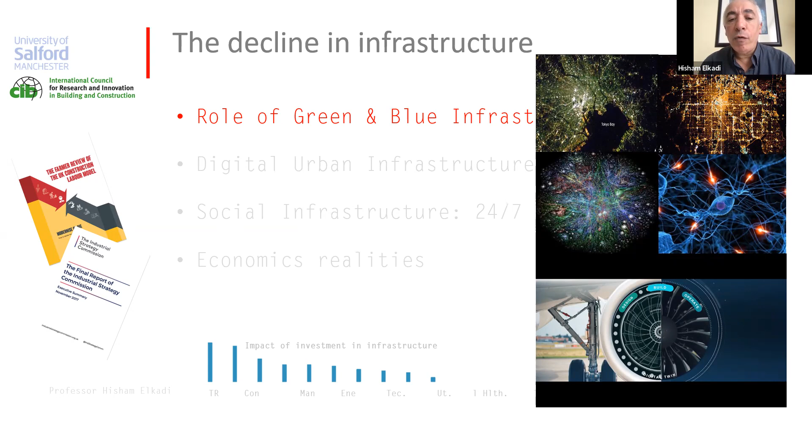There are other issues too, with digital urban infrastructure — the metaverse, what's happening digitally in cities, social infrastructure, the change of cities into 24/7 economies, and the economics and reality of that. All that is important, but today I can't talk about all of it, so I'll focus on the roles of green and blue infrastructure.

You've all heard about it — every single city, every national government talks about smart cities, smart buildings, smart urban settlements, and so on. If you look at what we mean, every time I try to ask what do you mean by smart cities, you get different definitions.

But generally there are two definitions. What I call technocentric, which is the use of ICT, all the gadgets, all the monitoring, collecting data everywhere, and building this meta database to make it intelligent, interconnected, and efficient. That's how it started about 10 years ago. But they realized they got all this data, and it doesn't make cities any smarter — it just collects data.

So they moved to the second definition, which is very much politically directed. They said no, it's not just about the data, it's about people, it's about services. I call this one people-centric — sorry about the slides, it's the other way around in the comment next to it. So the second is people-centric, about human and social capital, quality of life, participatory governance, and so on.

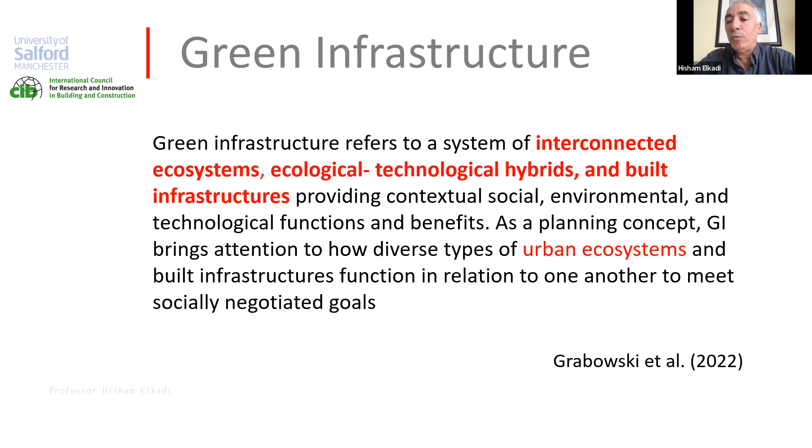And I buy this definition, and I apply it in a number of large projects in cities, which I'll explain to you in a minute.

Going back to my PhD and my conclusion, part of my conclusion in 1988, so that's 35 years ago, was these 9 principles. If you take away what I said about the definition of smart cities and what I believe is a good definition of green infrastructure, and you go through these 9 principles that I talked about 35 years ago, I think they're pretty good.

A portfolio for some of the projects. I've worked on these principles for a number of cities around the world, a number of projects of different scales, but I always have these 9 principles in mind when I do my projects.

Things about variety of energy resources. Remember, this was the 1980s, when there was very little talk about climate change, or no talk about climate change. Energy was sort of cheap at the time. It went through problems in the 1970s, but it dropped down in the 1980s. There was no mention of recycling of materials on a large scale. The reduction of energy output was not thought about carefully, and that is a very important principle for me, because that is not energy conservation.

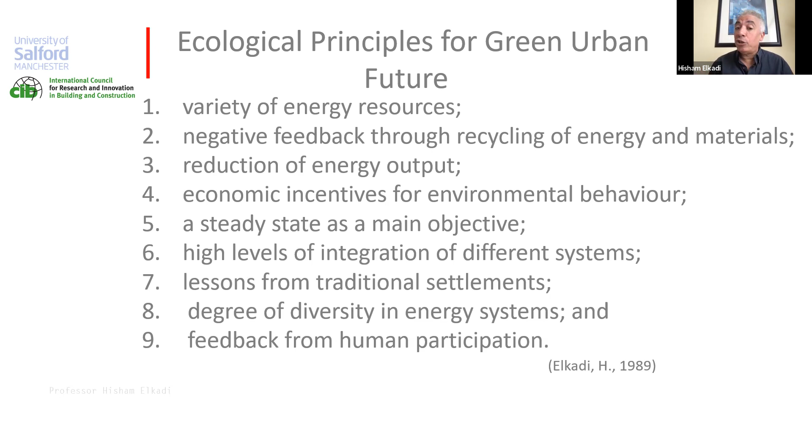There wasn't economic, we never had an idea about green economy at the time. I talked about steady state, high level of integration, because integration is the future for urban systems. Lessons from traditional systems, understanding diversity in energy systems, and feedback from human participation, which is mainly engagement, which we talk about nowadays all the time.

As I mentioned, I've been involved in projects in many parts of the world: Newcastle, Belfast, Rome, Geelong, and so on. But today I'm going to focus on these three: a project I had in Geelong, Manchester, and Karlsruhe in Germany, in which I will tell you how I applied those principles in those cities.

Geelong has a different problem. Geelong was an industrial city that has struggled to regenerate itself. It has major flood problems. It's like a little bowl facing north, and north in the southern hemisphere is like the south for us, okay? So facing north, it's a beautiful bay, beautiful setting. But because it's bowl-like, you get a lot of floods coming down on the city, and it goes straight into the bay. Pollution problems, but also flooding of the city center, which is at the bottom of this bowl.

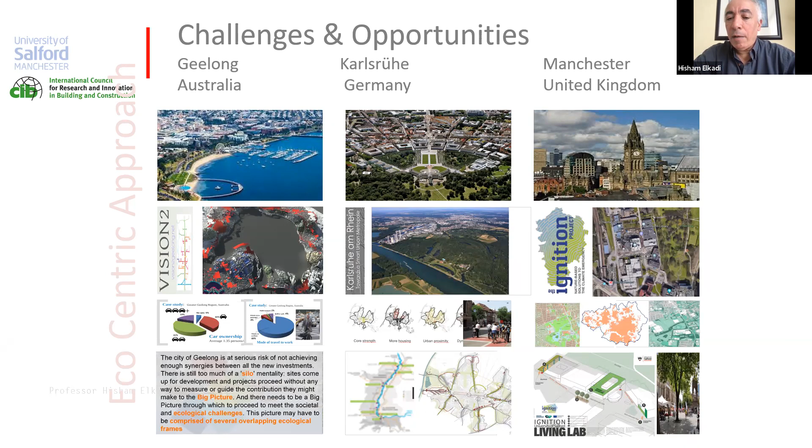The second city, Karlsruhe, has a very different problem. It's a completely green city that was designed to look like Versailles, the same structure as Versailles. It was built as a green city, but they have a major problem. If you look at the city, it's very far from the Rhine. The Rhine was the industrial part, but it was a big problem having a green city in the city center and an industrial area on the Rhine, with no link between the city and the Rhine.

The third one is Manchester, and Manchester has a major problem: it's one of the least green cities in the United Kingdom. Green space per capita is the lowest in the whole of United Kingdom. So we have this large project called Ignition, which I'm going to talk about in the rest of my talk, about how to increase investment in green infrastructure in the city.

So three cities, three different problems, but all my interventions in the three cities were something to do with green infrastructure.

Oh sorry, no, go back. We're already next, all right. So if we go, no, let's go back. Sorry, let's go back, all right. So let's go back, I don't know why it's going back. All right, so if we look at Geelong, I'm sorry, I'm not in control of my presentation, so I'm sorry about that.

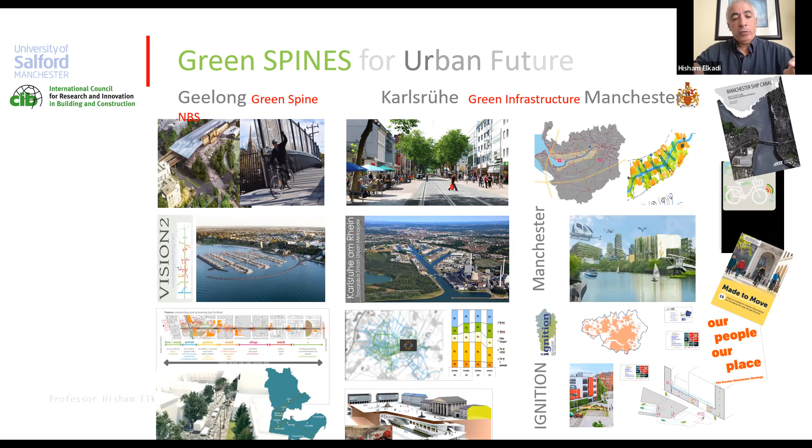So if we look at Geelong, what we did, remember it's a bay which has one big park on one side and a botanic garden on the other. So the project was between them: the high street, the city high street. So the first thing we said was we developed the vision for the city: to take cars out of the city center and make it a green spine between Johnstone Park and the Botanic Garden.

If we go down on that diagram, you'll see a little hand. Yes, all right, so this is one side is the green and the other, and we create a green spine there. Under Johnstone Park, we put large tanks, very large water tanks, to take the water from when it's flooding, when there are heavy rainfalls, and we use these large tanks to irrigate the green spine to the Botanic Garden.

This project, I wanted to tell you about it because green infrastructure in this project has produced a major investment to the city. This is finished now, the project finished about three years ago, and now has produced an investment to the city of about 16 billion Australian dollars. I was invited there - I'm just waiting for them to build my statue in the middle of the city, but I don't think this will happen, right, by Australia.

Right, let's go back. So that is an interesting one. In Karlsruhe it would be very different. In Karlsruhe it is already green, but how do you get this green corridor to the Rhine? We believe that green corridor - and as I mentioned before, it's not just the greenery, it's also the technological side.

So we extended - if we go down please, let's go to the map first. Yes, you can see the Rhine there, and you can see how we looked at the green corridors and tried to move one of the corridors with underground metro trains all the way to the Rhine and create a new node of the city center over there.

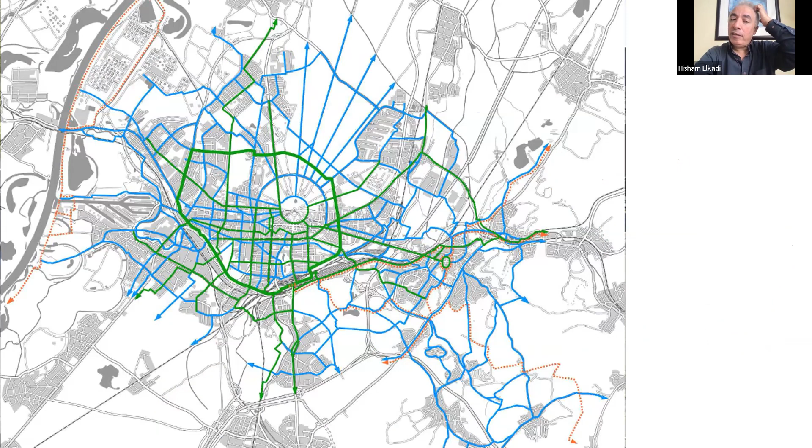Let's go back, and press on the underneath it, which is the metro. Yeah, so this project also has finished. I spent six months over there in Karlsruhe, and this project now is finished, and we create another node on the other part of the Rhine in the port, and hopefully that will create another big investment for the city over the Rhine.

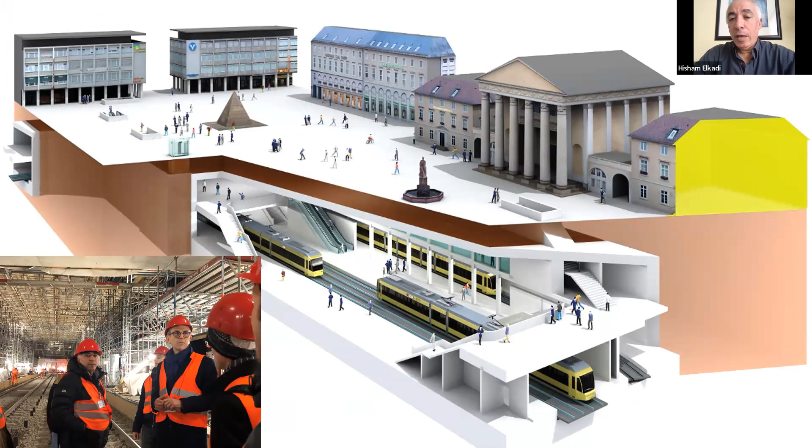Let's go back. And the last one is Manchester, and I have another big project over the Ship Canal, which is another green corridor over the Manchester Ship Canal, but I'm not going to talk about that now. I will focus on the Ignition project.

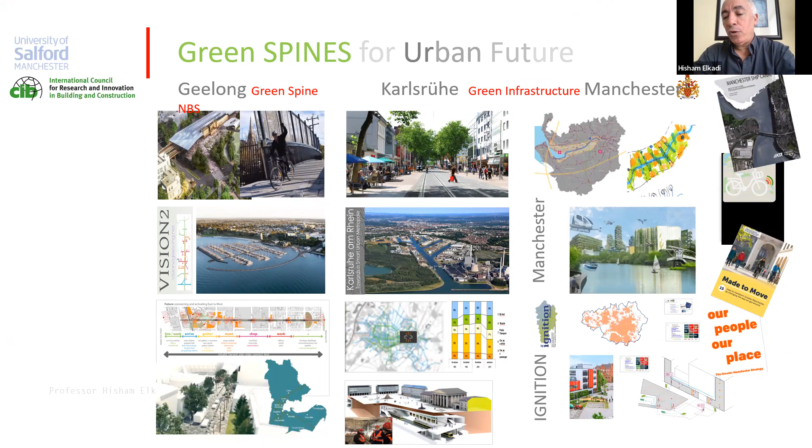So if we go to the little square under Manchester, on the third one - go back, it's the next one. It's the one underneath, yes, this one. And I wanted to tell you a little bit.

So the Ignition project is large - well, not very large. It's about 9 million euros funded by the European Community. And the idea is to build up examples of green infrastructure that would encourage investors in the city to work with. Why did we need to do that?

Even when I worked in, say, Geelong or Karlsruhe and so on, these cities faced - I realized that there is a big problem with green infrastructure. The big problem is maintenance. And also, we don't have enough data. We don't know how green infrastructure works. We do not know what is the level of hydrology and maintenance and how to make it autonomous in a way. All this knowledge - everybody's doing green walls nowadays, right?

I'm sure in Purdue there will be quite a few buildings that would like to build green walls. We have a lot of green walls and green roofs in London.

Nowadays, I don't know if you know of this, but there's a major, huge problem with them because they dry up and become a fire risk. Once they're a fire risk, insurance companies withdraw their insurance, and if a building loses its insurance, it becomes empty. We have quite a lot of this situation in London now because of climate change and long periods of heat waves. So we need to test all that, and that's what Ignition was all about.

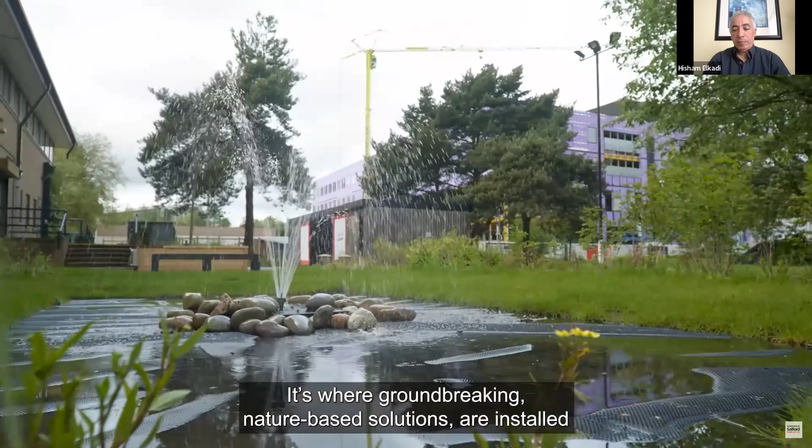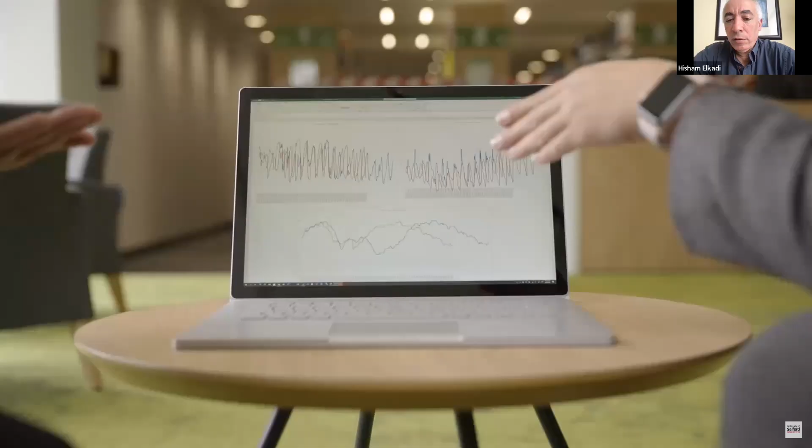So the most important thing here, as I said, is integration of different parts of these new installations. This is the area which we are researching, so we have all the data everywhere. This is the attenuation tank you're looking at, a very important part of the project.

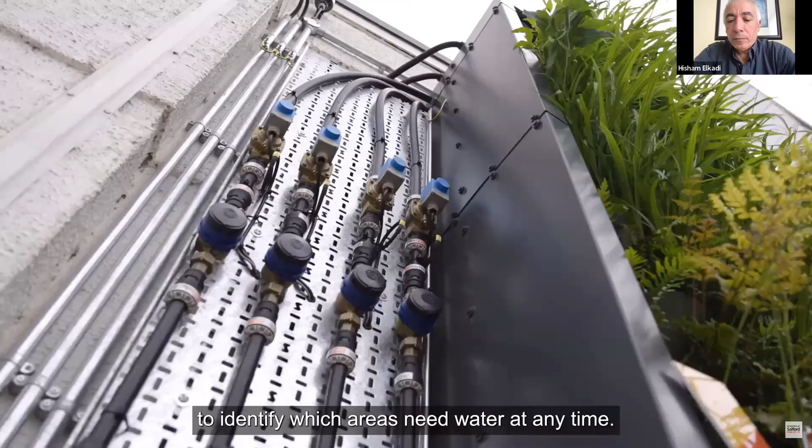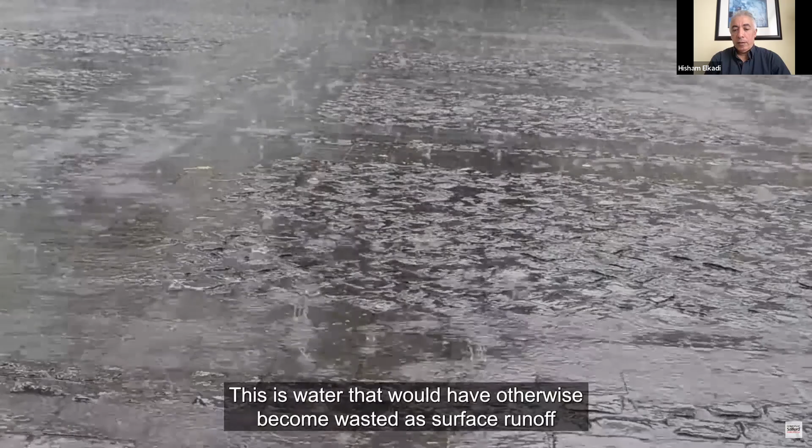Right, can we stop here for a second? Can we hold it, Cole? One of the major problems in the UK is that, I don't know if you have the same rule in the United States, when we have large projects, it's by law that we have to create attenuation tanks in order to release the water into the system gradually. These large attenuation tanks usually fill up, and companies and organizations need to release water from them, which means overloading the network. When we overload the network, United Utilities in this case can't cope with large amounts of gray water, and they have to release it into waterways and rivers.

This is, of course, politically terrible. There are people here in England, crazy people who swim in zero temperature rivers every morning, and they don't like that. So DEFRA, which is the environmental ministry in a way, got upset with the utility companies for releasing water into rivers. But the utility companies said we can't cope anymore with climate change, with all the floods and rain coming down. It's a huge pressure on the system, we have to release it.

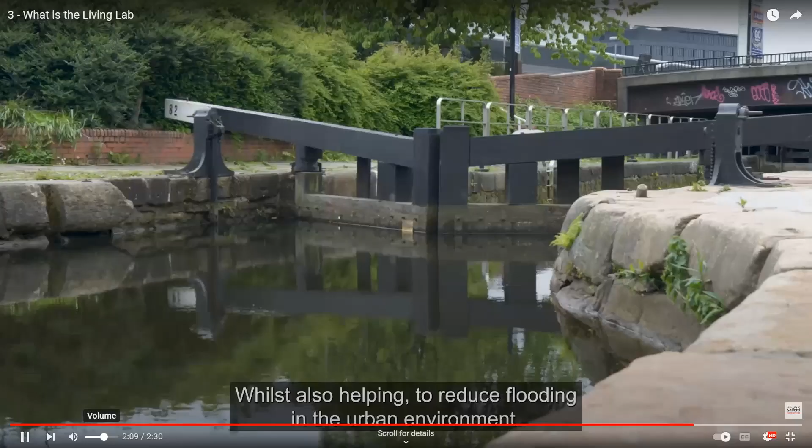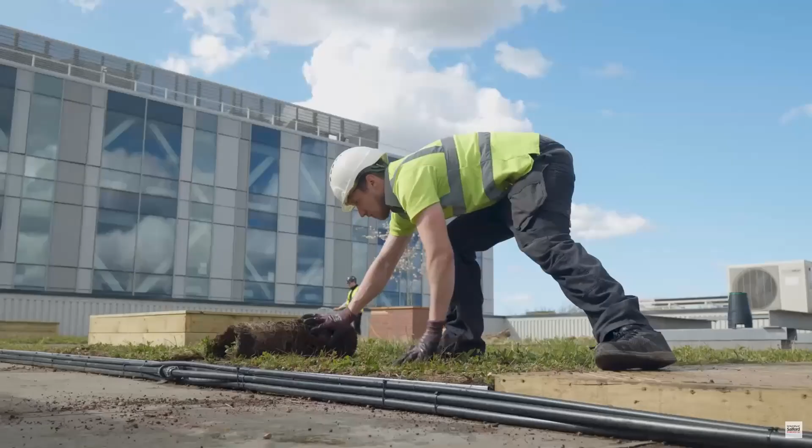No extra cost, whilst also helping to reduce flooding in urban environments. Most of the solutions are pre-made off site, creating the added bonus that on arrival it's just a matter of putting them in place. These solutions are especially beneficial in towns and cities as they reduce disruption on site.

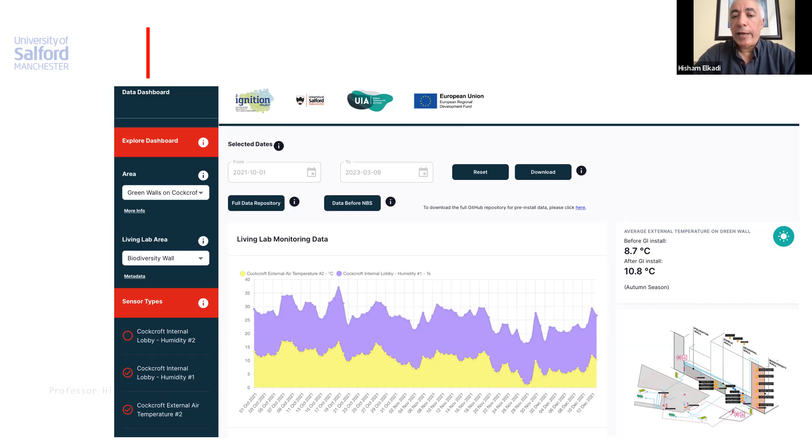In the 3 cities I mentioned, there has always been this idea of a green spine that we try to apply. But as I said before, this green spine needs to be properly designed and properly tested in order to become autonomous, in order to make it work better. That is where the living lab, the ignition living lab, would help us understand how to create a real green infrastructure that, as the definition says, combines the natural environment with the gray infrastructure.

We are not, and we should not, reject the technology of the gray infrastructure in order to replace it with some sort of plantation installation. It has to be integrated, and it has to work together.

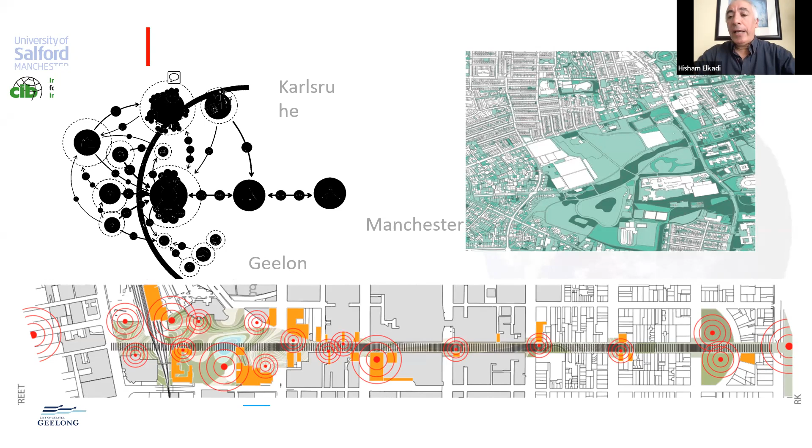So next, because I believe that the future will be linear for our cities. I believe that what we learned from the pandemic, for example, and the accessibility to nature, is so important for our mental health, that we need more linear development with the green infrastructure coming into the city, very close, and we don't have this sort of centric city center anymore. I don't think we need that.

And interestingly, the Saudis were the ones who wanted to create the line. I think it's a ridiculous line of 170 kilometers, but the idea, developed by the architects in California, I think that's what I can see the future is. The difference in Saudi Arabia is that there is no green infrastructure going into the city, and I still believe this line is too long and too wide, and it's a prestigious project rather than a project that would implement and express the aspiration of humanity for future cities.

I hope they will take that into account and integrate the ecological system within that line, because it's a very big experiment for humanity for future cities. Thank you.